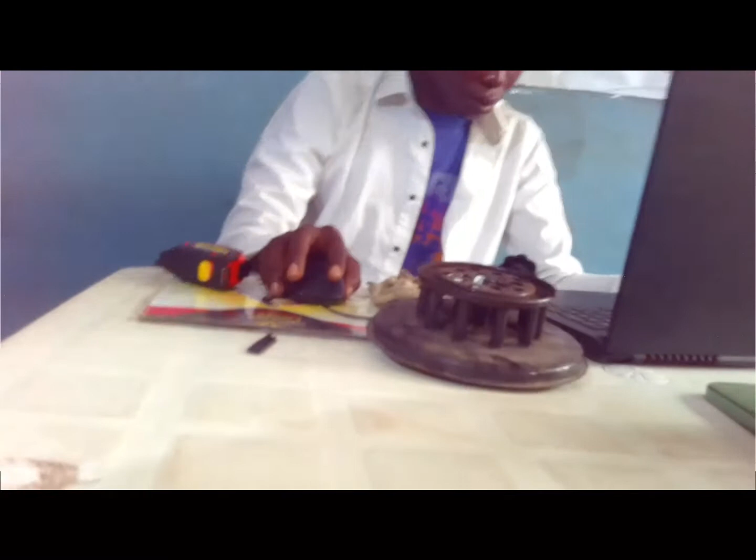Let's begin. I'll assume this will be my top plane. So go to SolidWorks, new, and start. I'm assuming this will be my top plane, so I'm starting with this.

Now I want to measure the distance between here to here. I find it to be 70, and I find the height to come up to 13.5.

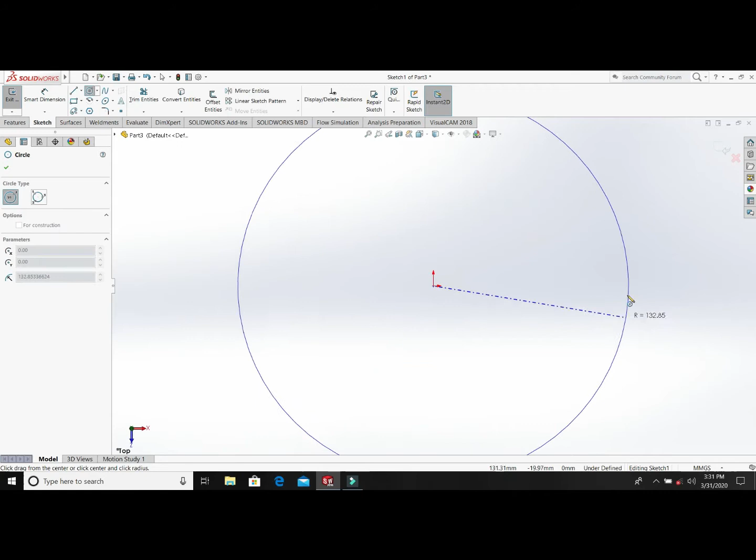Go to Feature Manager, Sketch, and use circle tools. You can generate this with only revolve, or you can also use extrude to get it. I measure it to be 70. I'm doing my measurement again to be sure. Okay, 70, yeah, so we're doing 70.

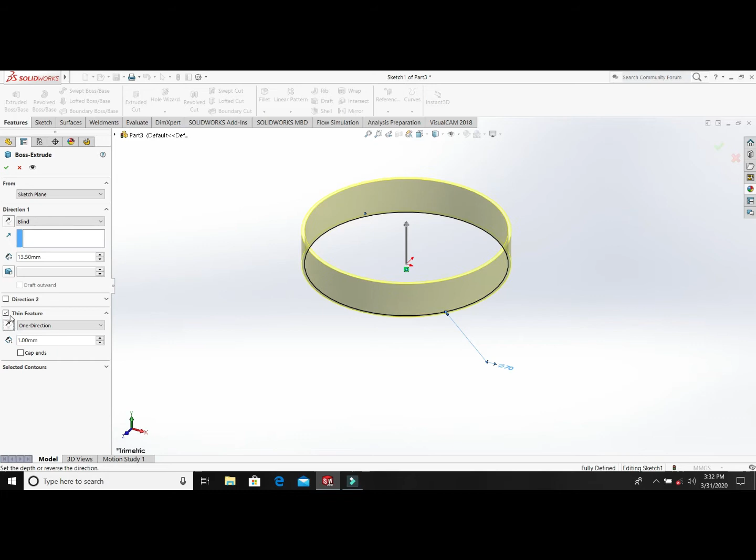Then with that, I'll go to extrude. There's only one thing you'll be adding to the extrude - the height, which I found to be 13.5. So thin feature 1mm, then outside extrusions, then use cap ends to be thickness of 1 also.

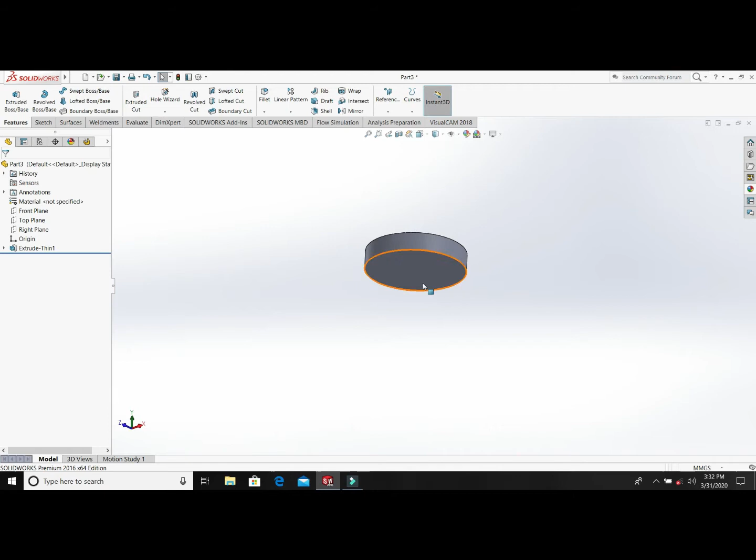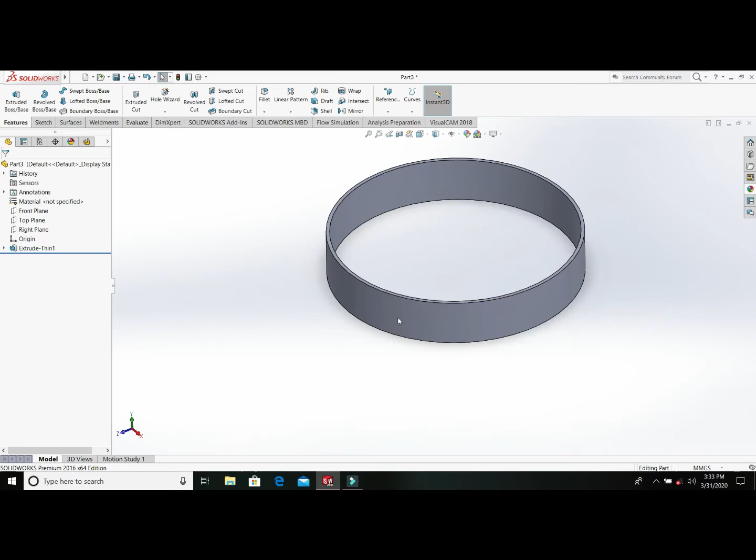It caps both ends, but we don't need both ends covered, so we only need one end to be covered. Let's keep going.

From here you click on this face and say sketch on it. Using convert entity, you convert that face and cover it up. Then extrude with a 1mm extrusion, taking it in the next direction. Then you have this - we've created this space now.

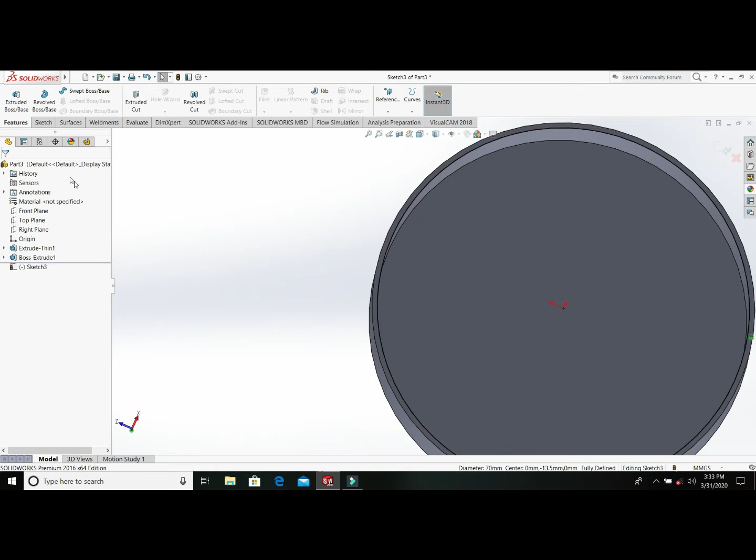The next thing to do, if I want to give this small effect, is to just turn it upside down. Let's do that fast. Click here, say sketch, put here, say convert entity, then extrude by 1mm. You extrude thin feature and make it 5. Let's see what 5 gives us - it looks too big.

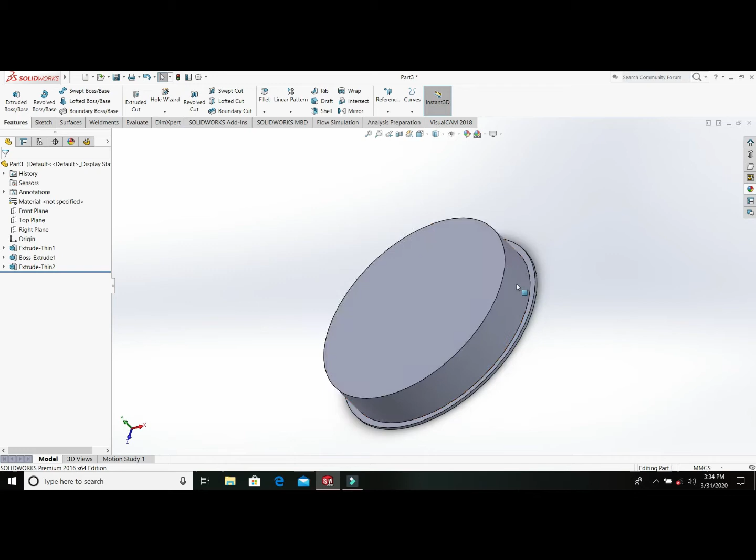All these places were not smooth edges, they were curved edges, so I'm doing all those fillets now right away. This is curved edges, this is curved edges, this is curved edges. So it looks like this - fillet at 1mm, let's look at what that looks like. Right, looks perfect. Then at this edge, the fillet seems too much, so something around 5mm - alright, this is 3mm.

Alright, so we are on the top of this surface now. I want to create this hole. From the center, the hole is at 40mm, and the diameter for the hole is 10.

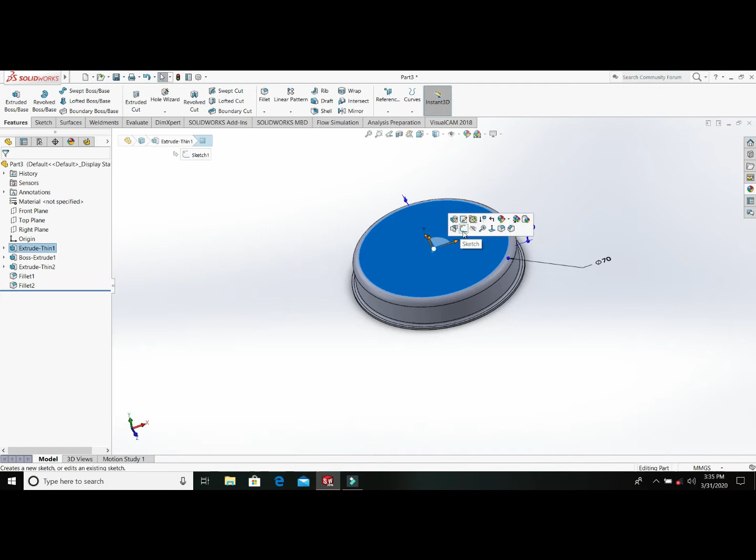Click on this surface, sketch on it, then using a construction line, go horizontally this way. The distance from here is, okay, it's showing 40. Wow, sorry, let's measure this back.

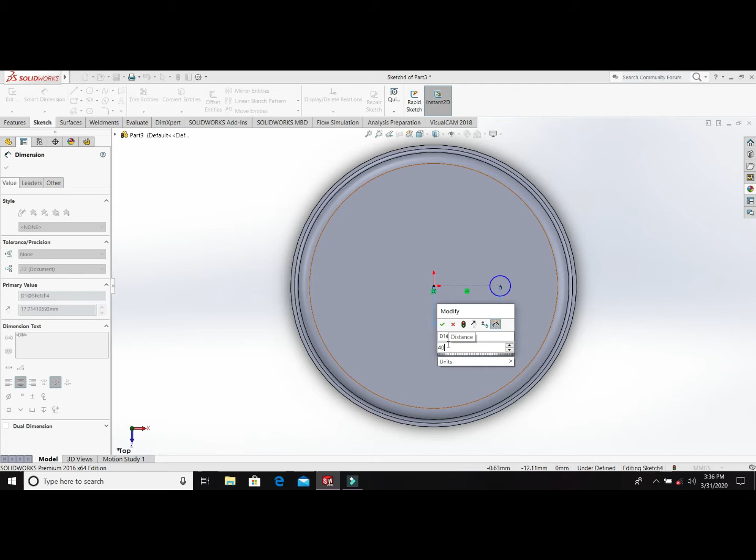I will make it 170 - sorry, it wasn't 70 that very first one, but I will edit it. Let me just finish this - 40, then the diameter is 10.

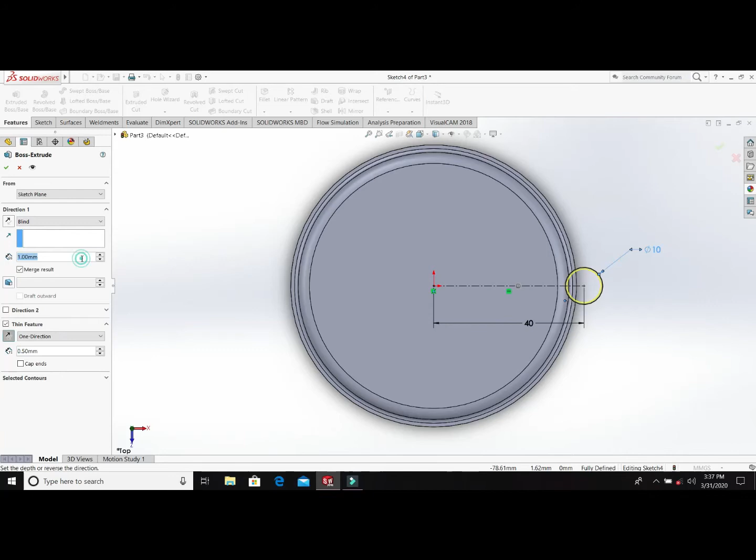So let's do extrude, thin feature, 1mm inside and 0.5mm inside. Then for the height of extrusion, let's find the way of measuring it. This guy is 15 to me, okay, so this is 40 to me. So the height of extrusion is 40. Then we put 40 here - with that we are good to go.

Let's go back to our previous sketch, that is 170, and drive it back. I'm adjusting this to 170. In SolidWorks, if you do such editing after a lot of work, you go to this symbol, which means rebuild, and click on rebuild.

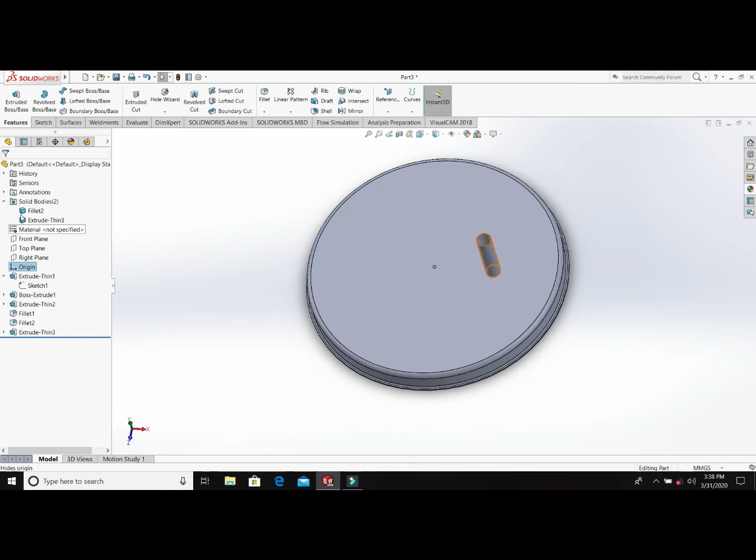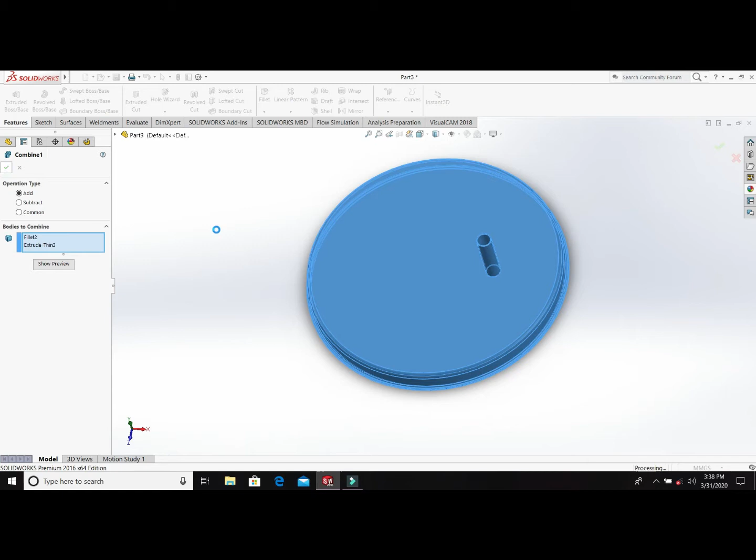It's a part of SolidWorks called multi-bodies. I don't know why that's coming up now, but what I'll do is combine those two bodies and make them one until it's combined. So add them together and make them one, so I'm not actually designing two bodies.

Alright, click on this surface now, create a sketch there, convert entities, and extrude cut. So that's a small cut.

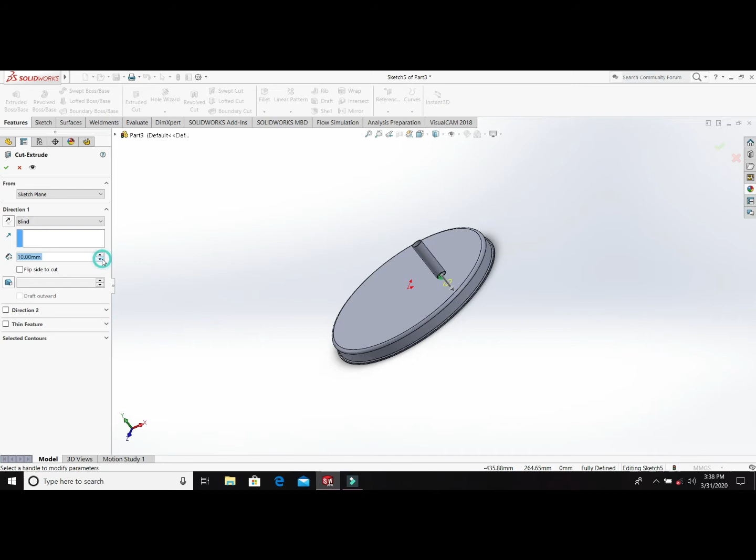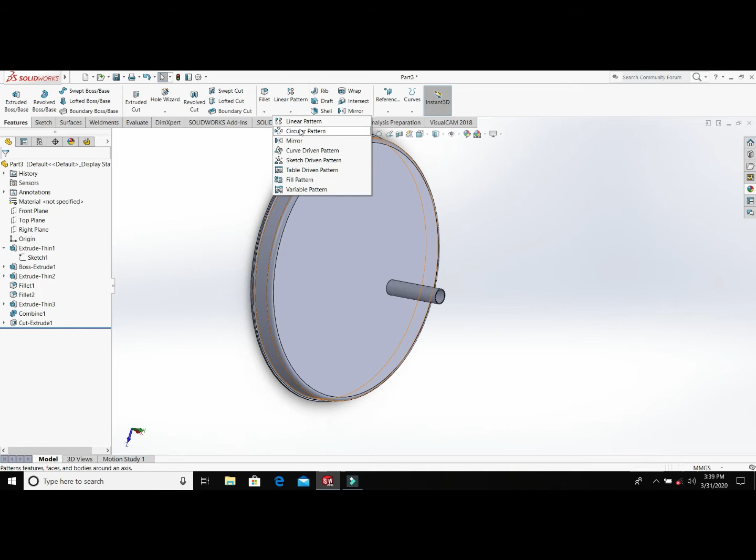So we'll do a circular pattern of this particular thing we did now. We want to do a circular pattern of this in 10 places. Circular pattern - what are the features? The extrude and the cut that comes with it.

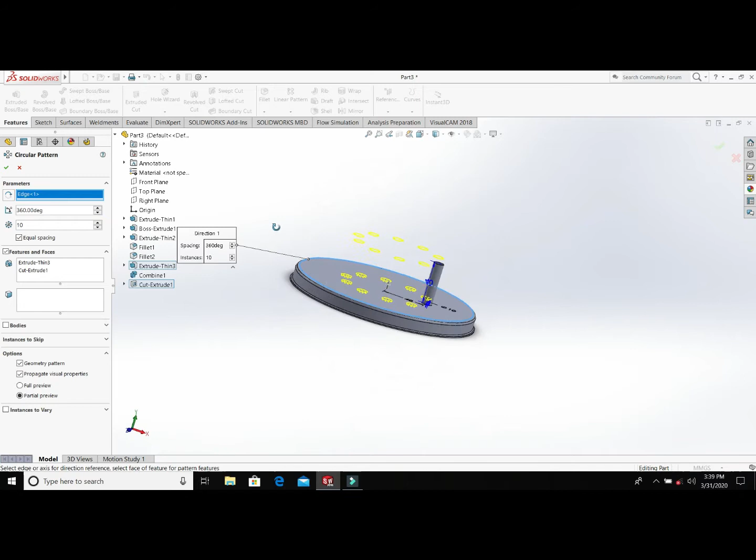So what's my circular edge? That's my edge. I need 10. So put the 10 showing, I'll mark it. Alright, so we have the whole 10 part now.

So I need to design this place where they were sitting on, this particular point where I'm putting my hands on now.

So this is 104, diameter is 104. I need to create something of this nature, and the thickness from here to me seems to be 10 mm.

10 mm. So you zoom out here to the surface, the surface of this guy, that's where you zoom to, and you say sketch. Normal to you, then you measure this guy to be 110. Let me check and confirm again - 104, sorry, approximately 105. Then you put dimensions 105.

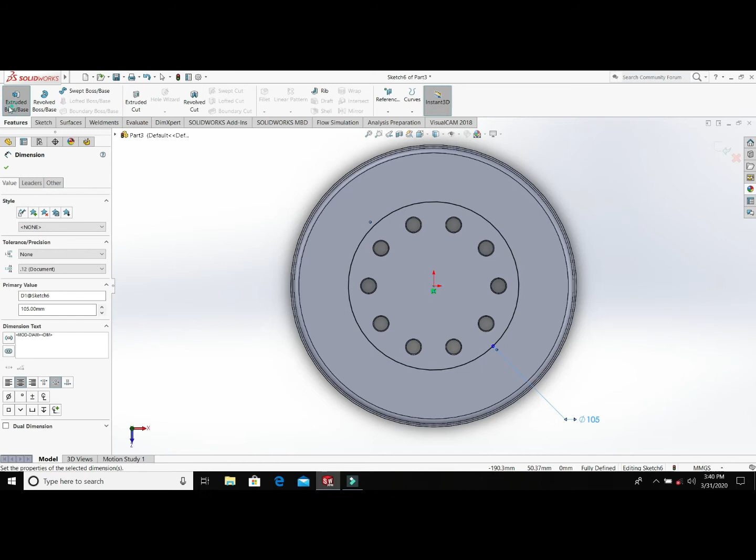So you do extrude, and you do that by 10 mm. Okay, 7 mm. Alright.

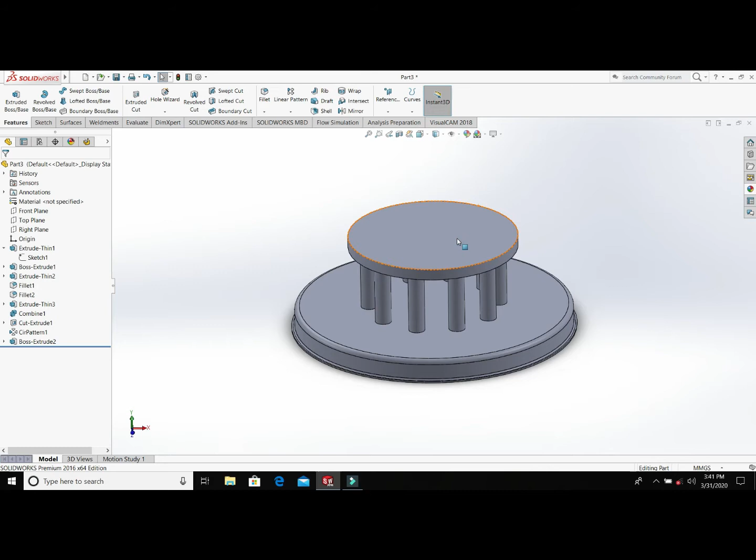So you need to expose this head from here. The only way to expose this head is to do an extrusion here - extrude cut, sorry, you cut that particular place. And that's the reason why you see this groove cut now. That's what we want to do, this particular groove. Let's see.

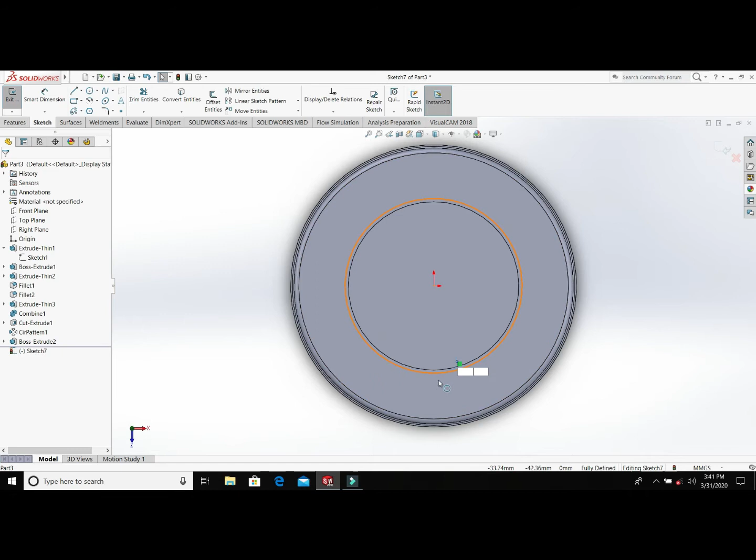Alright, easy. The easiest way to do that is to just say offset entity, so offset entity by 2. Alright, that's an error. Let's say -2. So the offset was in the wrong direction. I just put -2 there so the software knows I'm talking about the reverse direction.

Then you do extrude cut with the same thing. Then you extrude cut to where? You cut up to a surface - which surface? This surface, so that you can expose the head of those things. But it's not a full extrusion, it's a thin extrusion. That extrusion has to be, measuring this particular place now, about 13 mm, 13 mm in the other direction.

Alright, with that being done, let's see. Alright. So we are having this issue.

Alright, let me fix this very fast. Go to that extrusion and make it in 2 directions. The other direction, make it 2 mm. Then the problem is fixed. Oh wow, let's see what happened - this 2 was 2 dimensions.

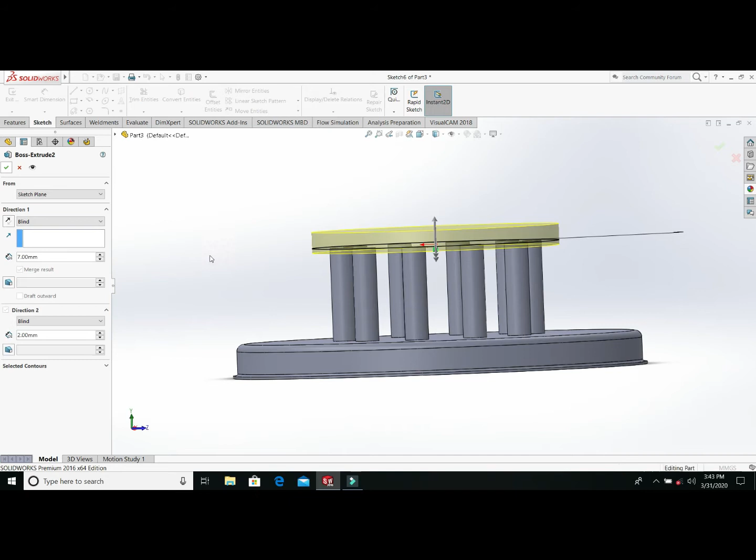Alright, so if you have such results, the problem is that the cut instructions were getting done. Two ways to do it, so let me use this first way to solve that problem that we're having.

Instead of up to surface, I will take blind, then I will take 7 mm. If you feel that the 7 mm will link me to... right. So let's use 8 mm.

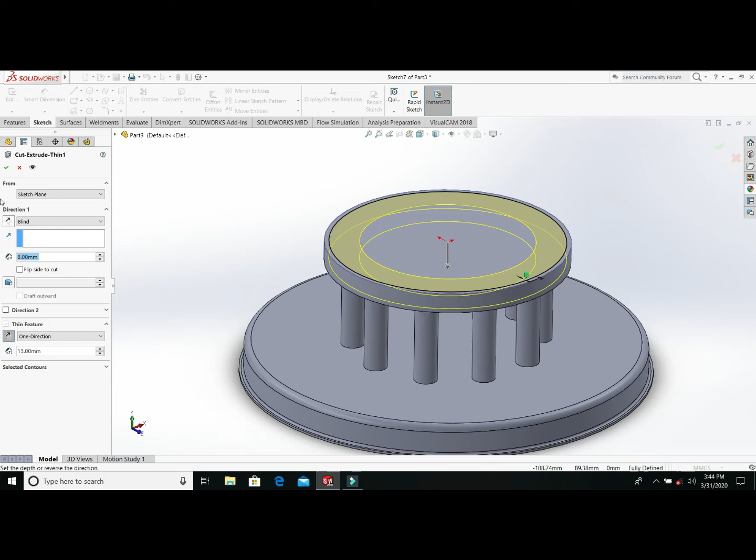Okay, just to simplify this, let's do a sectioning and let's see what's happening here. No problem, let's fix it.

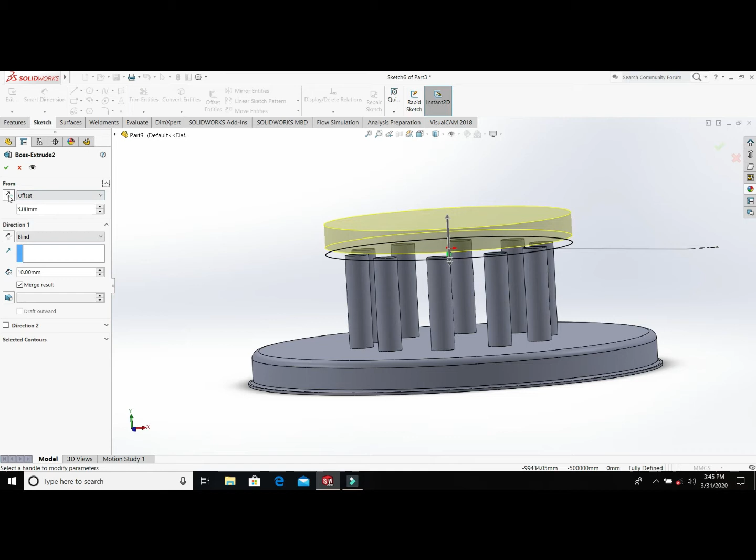Sketch plane, offset from the sketch plane. Now direction 1, make it 10, then 3 more - let's see what 3 is. Then take it to other directions.

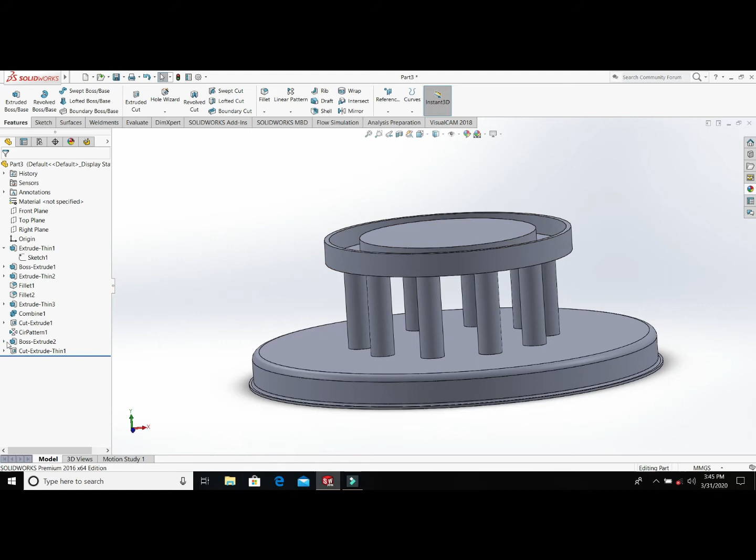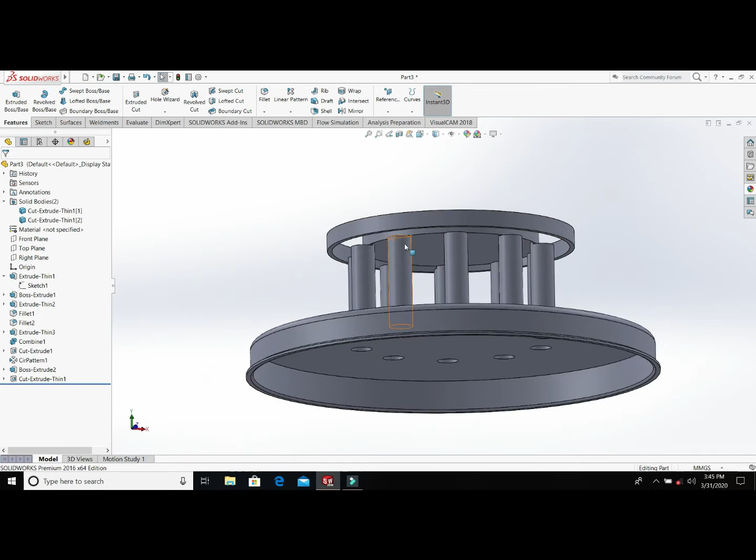Okay, very simple, go back to this place, make it sketch plane, make it 7.

Alright, let's do this one, just to solve that problem very fast. Sketch, convert entity, convert entities, then do extrusions.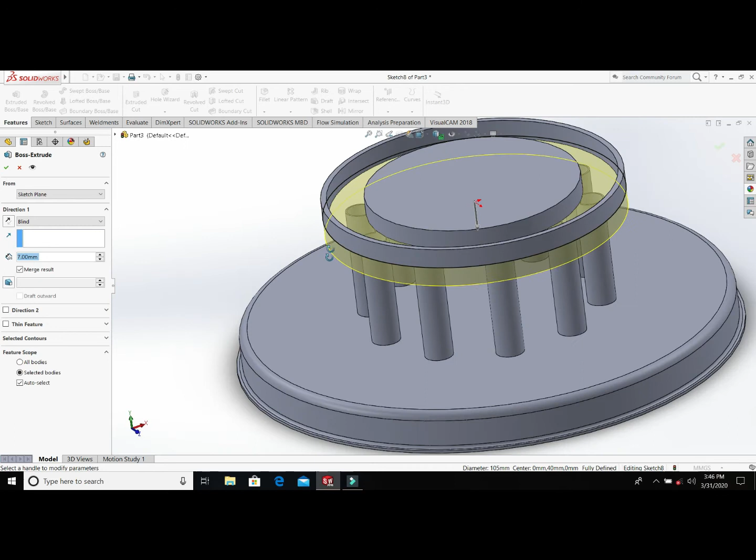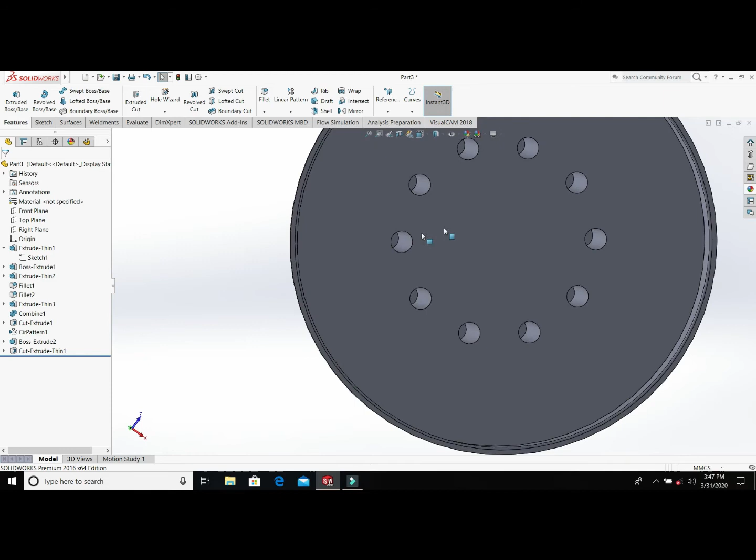Alright, from here, let's find a simpler way of doing this. Click on that surface and say sketch, click on this surface and say sketch.

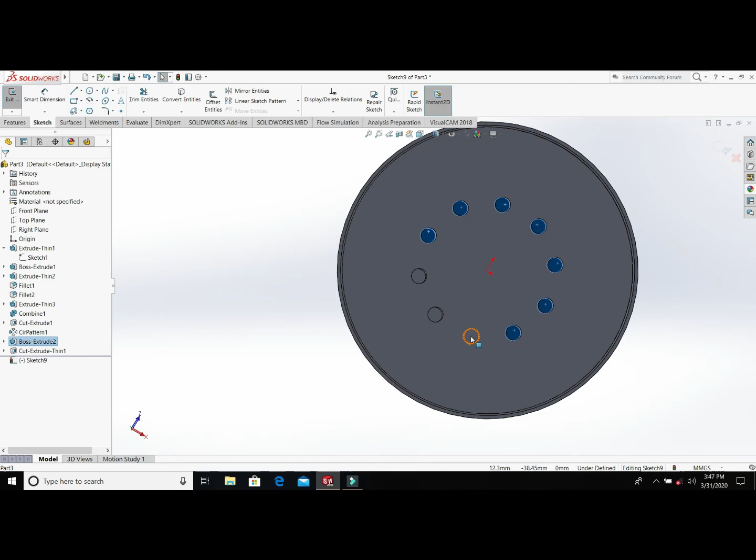So I'll quickly select all those surfaces inside now. You hold down your control key, then select all these surfaces just to make it faster. Then you do convert entities. Then with convert entities, you say extrude cut. With extrude cut now, you say through all...

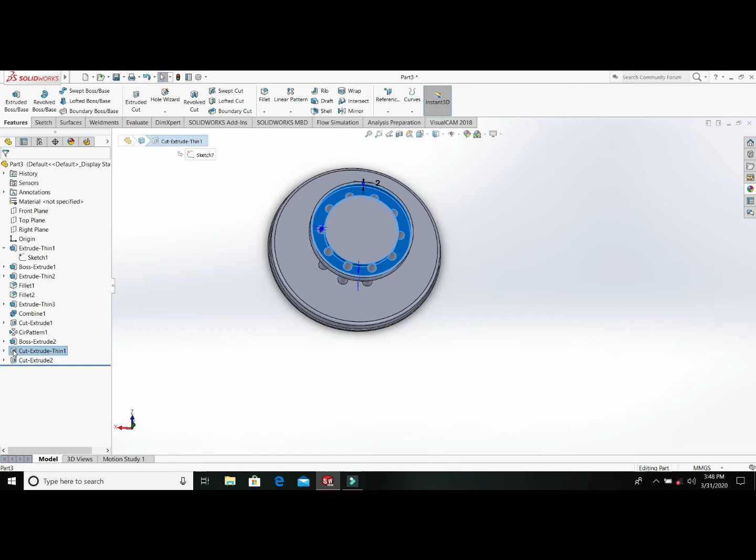So we're having this issue now, let me go back to this cut and adjust the cut to 17. Alright, so we have that now.

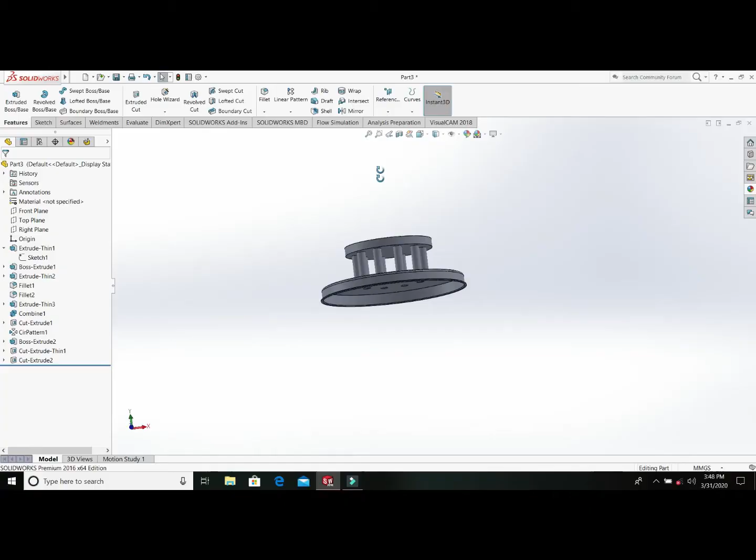So remains this effect, this fillet here. Then let's get all those fillets done very fast. So we are filleting this place, and this place.

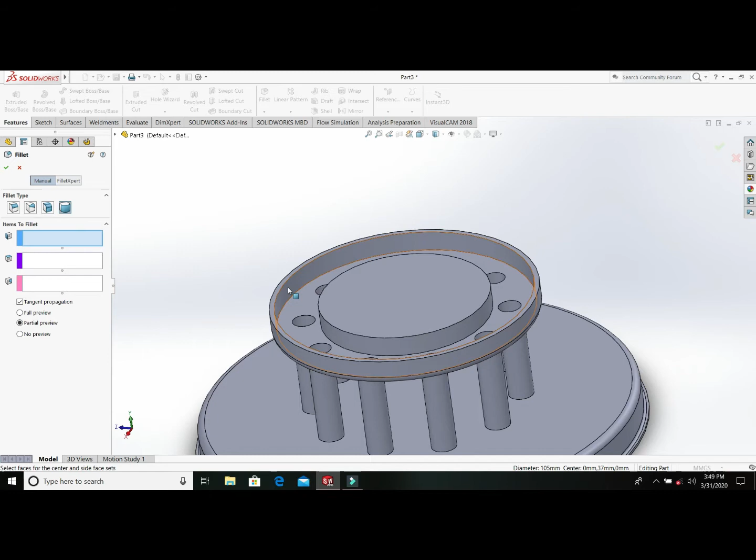So what remains here? We're filleting this edge now, this particular face. Fillet - this time around we'll be using full round fillet. We're taking this place, this place, this.

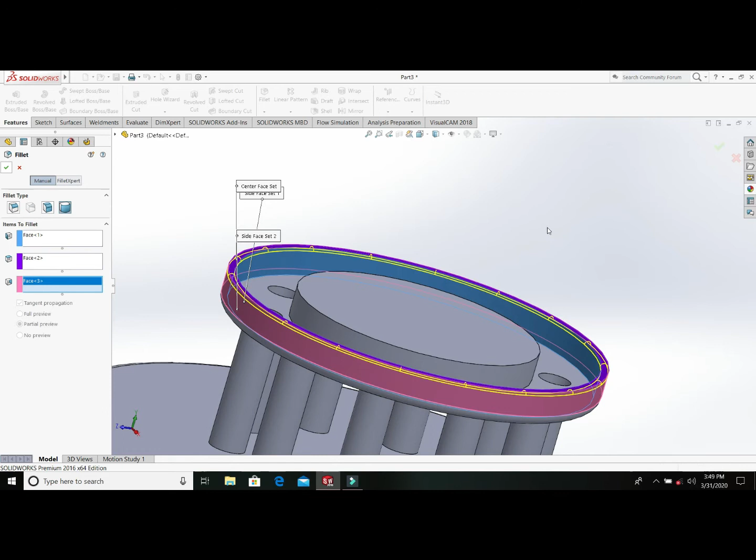Alright, so what next in this one? I think for this particular part now, we are done with it. I'm done with this particular part, so we can move on.

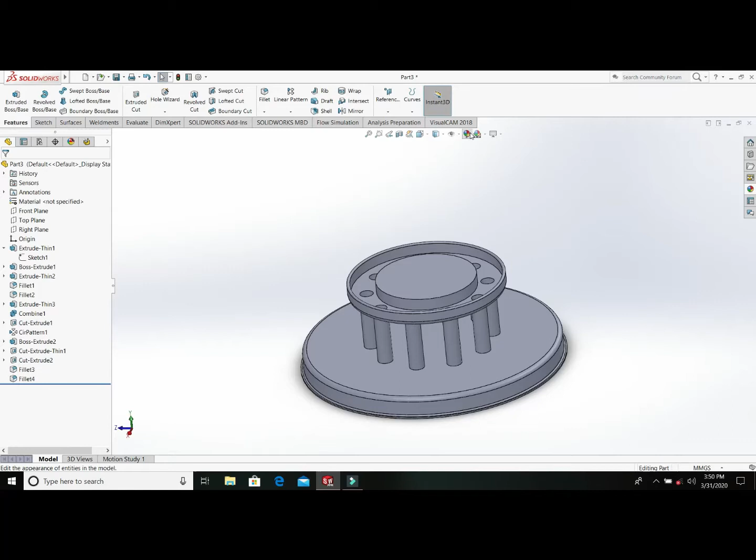So if you are done with that - so it's in black color, let's put a color to it, because black might not be too visible on our screens here. So I'll find a suitable color, and I think this is okay. Mark it once you're done, and say save.

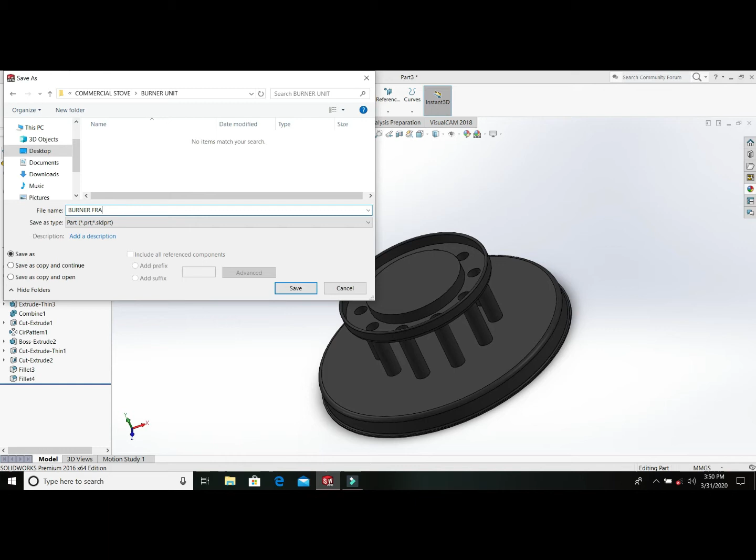So here, let's open a new folder called burner unit. Because the unit is also an assembly, it's called burner frame.

Alright, so we have designed the frame for the burner. The next thing we want to do is this carriage mechanism, this carriage lever. The carriage lever has this base, then has this particular system here that takes it up. So what we are doing now is to design this. I can see this as a circular image from the top plane.

Alright, so Control New. So I'm on the feature manager, then a circle.

So the radius is 51 plus, diameter is 102. Then I will do extrude.

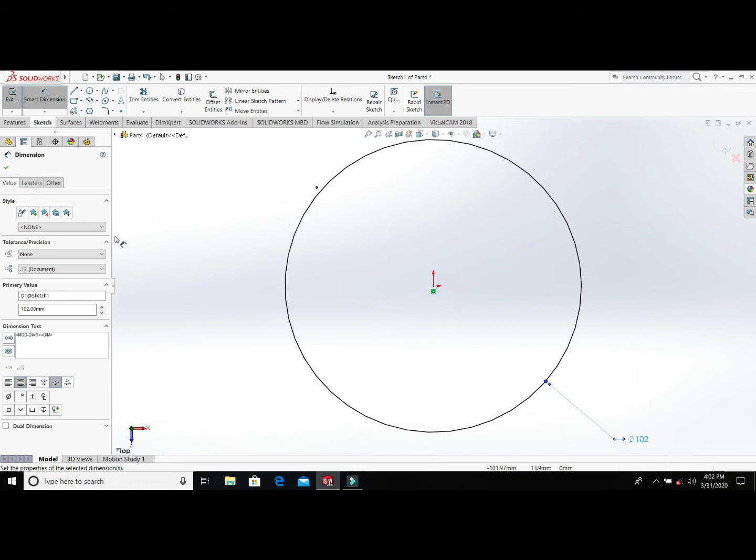So that is like 2 mm or 3 mm, I guess maybe 3 mm. So there is a small cut inside, offset, reverse 1 mm, then cut, offset from the surface, and the offset distance 1 mm also.

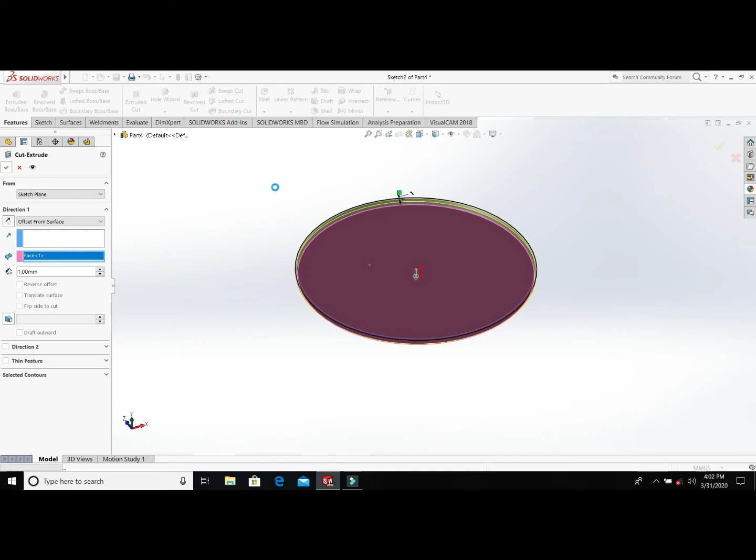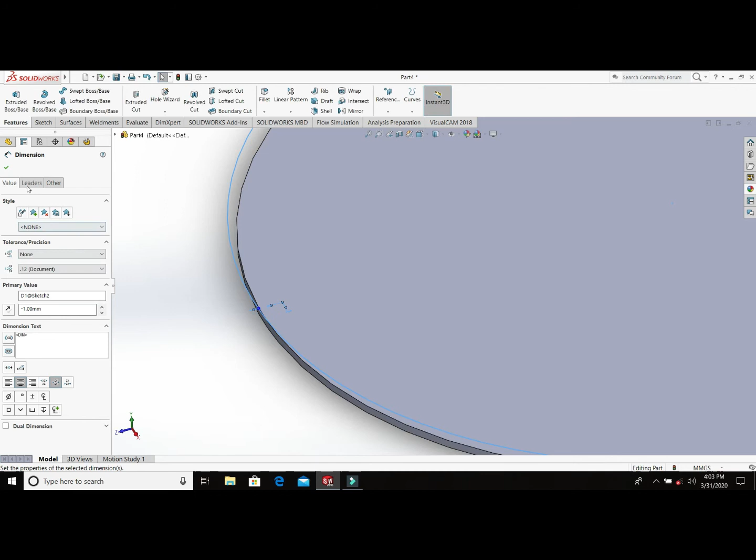What's this? Alright, so the offset is wrong, so minus 1. So very good, yeah.

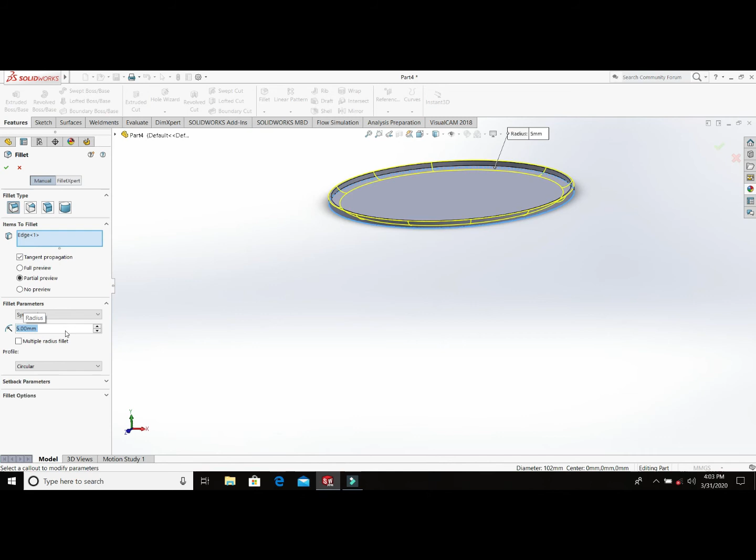So on the fillet here, alright, let's see. So we have that, and here some fillet ready. So we have that now. Okay, let's locate this sample.

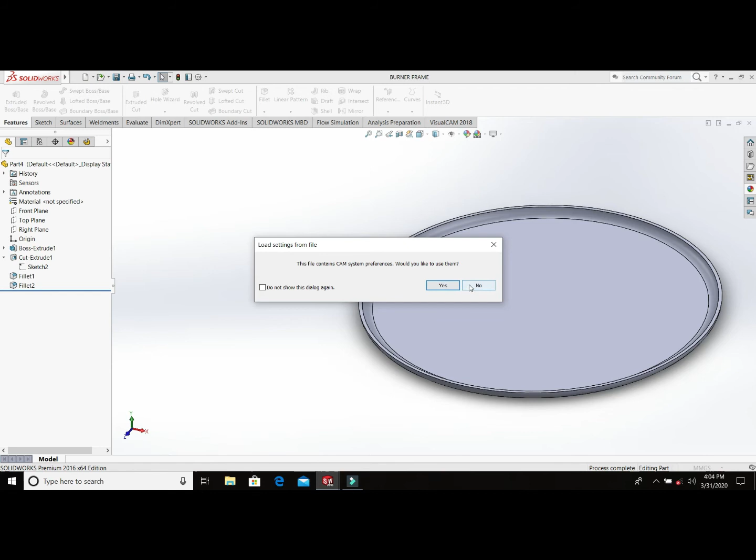But in order to simplify my stress during assembly, I'll go and open up the previous part. I just want to measure that exact location where I put the hole here.

So that it will be much more easier for me. So that particular extrude thing, put it at 40 from center. So I'll come here, extrude click.

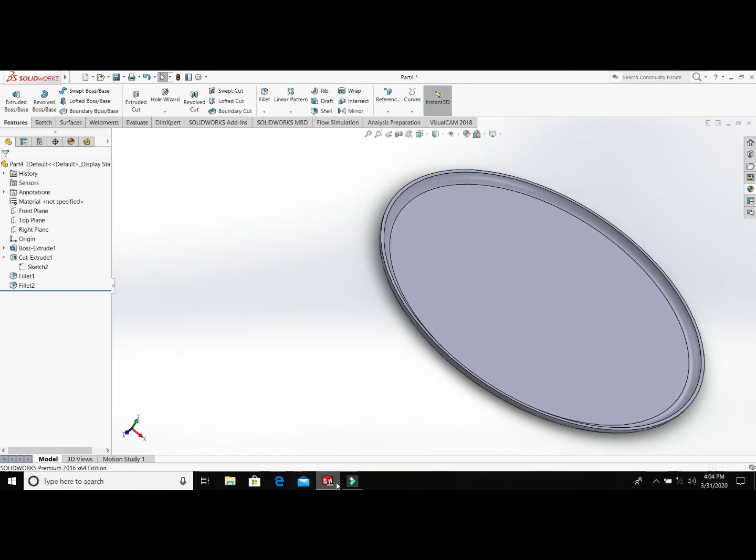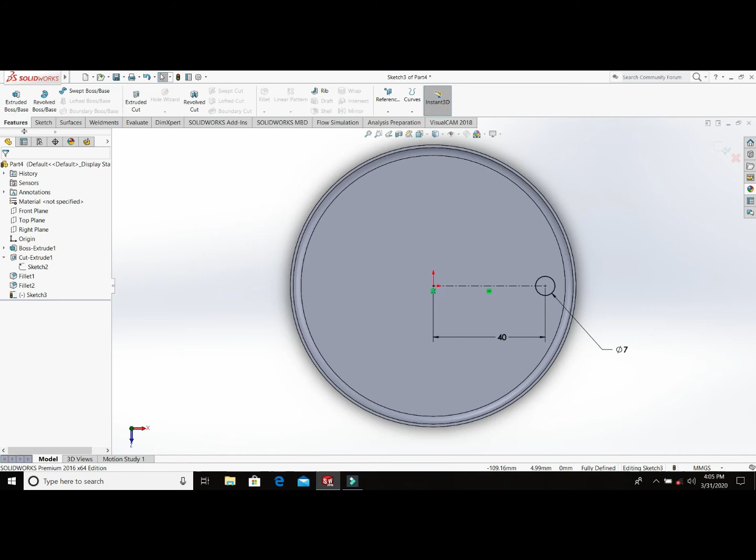40. Then this guy will be 7. Make this guy horizontal. Then you have extrude 10. Then you extrude 10 so that you see if you lower this guy here, this is the feature we are trying to create. This one here, what we are trying to create.

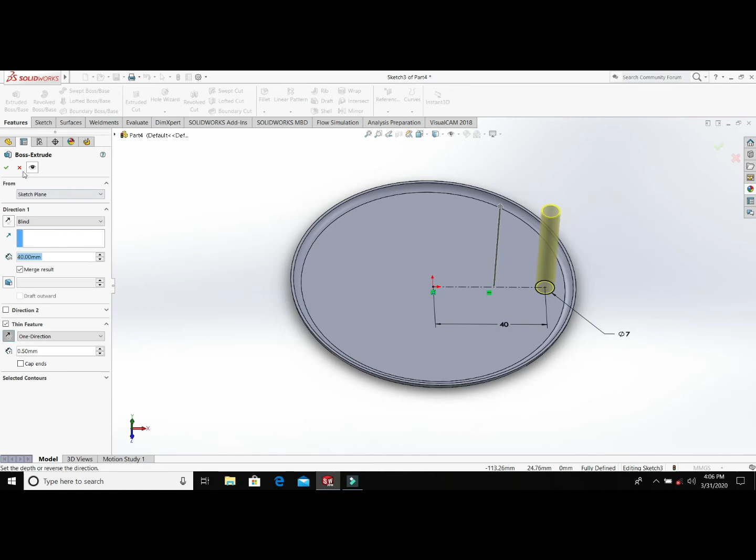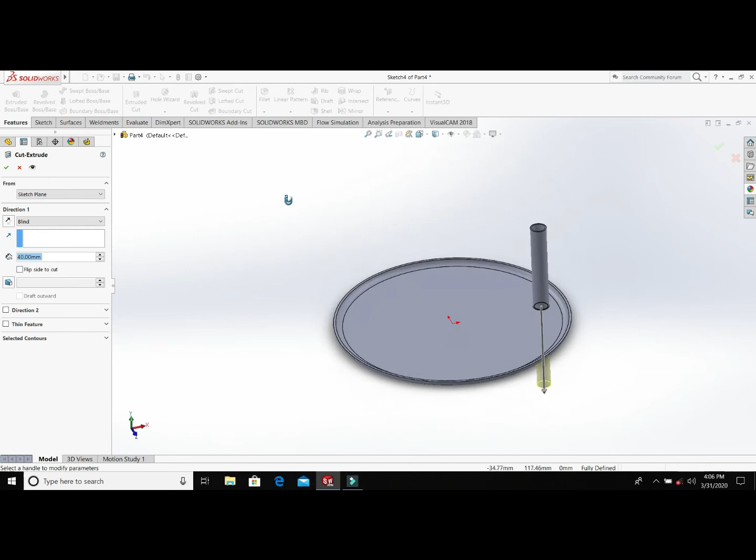Click on this surface, sketch on it. Offset, convert entities, then extrude cut. Then you do that. So what remains is to now do circular patterning it in 10 places around here.

Alright, now that has been done, the next thing that we need to think about is that there's a rack here that we need to take into consideration. So the rack was actually attached here. I want to make them as a whole body now, just to simplify this video. So the rack was attached here.

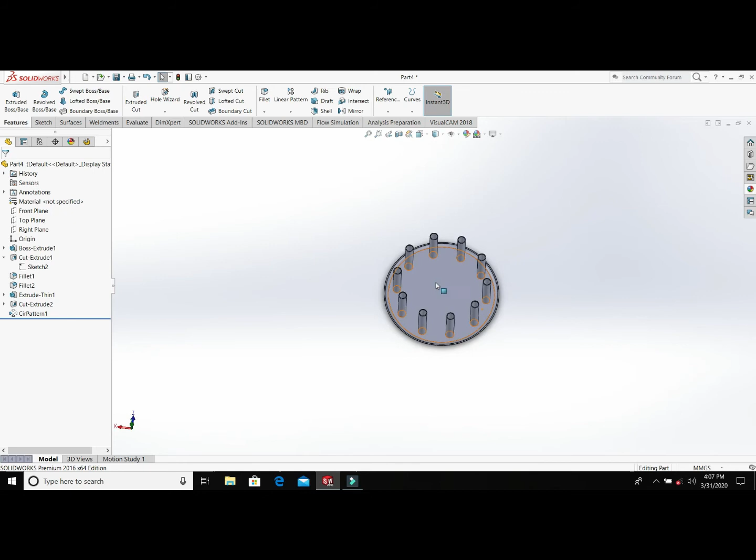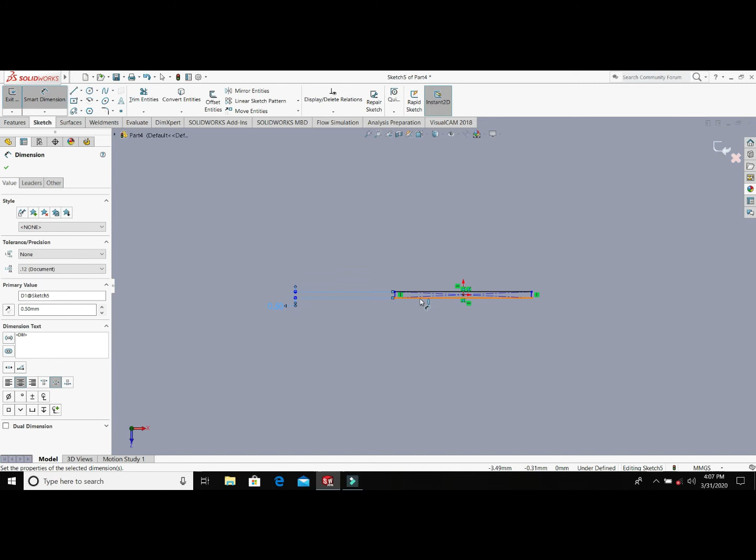So on this surface, click and say sketch using a center point rectangle. So make it 0.5 mm. In this case, maybe make it 8 mm. So I make the height also 40. So extrude that 40 mm.

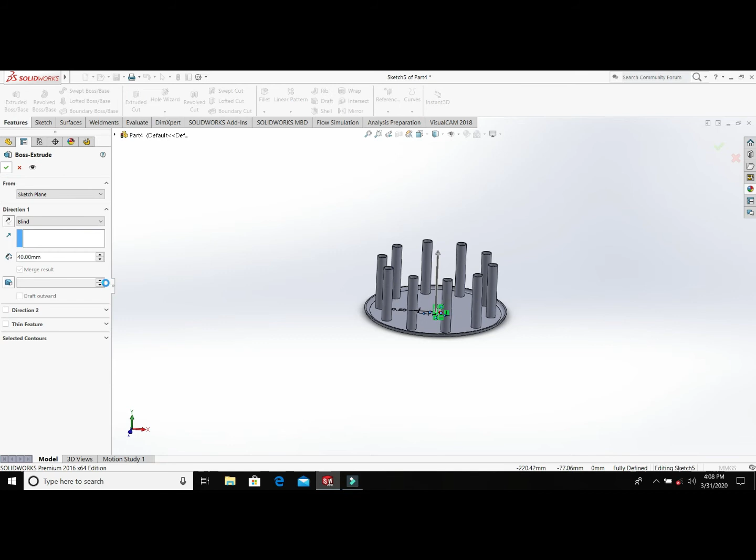Alright, so now to create the groove, the gear system at which the whole thing will go through. So all you have to do, if you are to create this gear - I don't know how to show you this particular gear - if you have to create it, what you have to do is to create only one of those teeth.

So click on this surface and say sketch. Okay, sketch is active. Using your line tool, create something that looks like a trapezium. Alright, so...

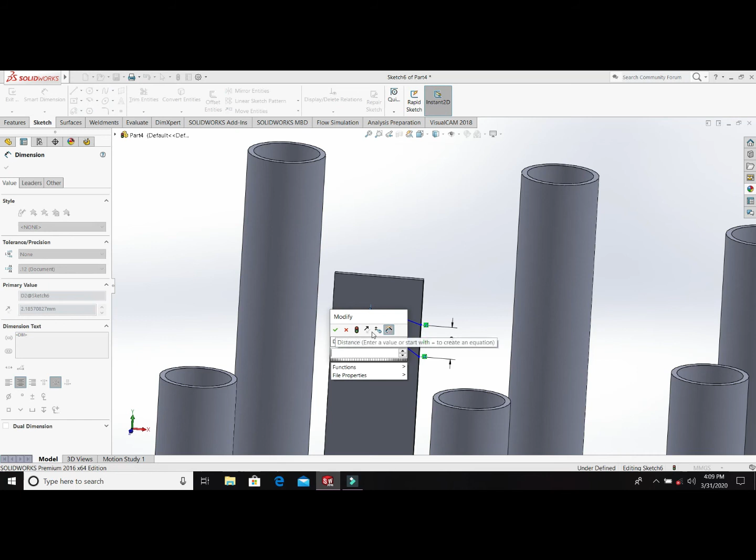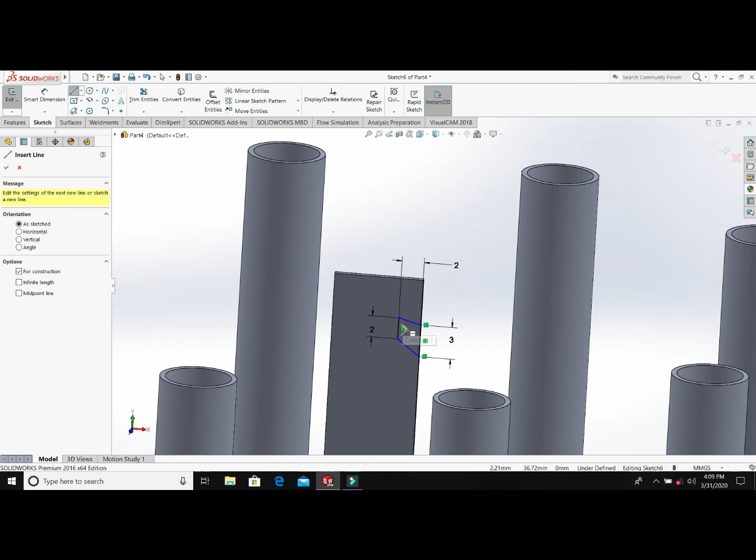Let's give it dimension. So each tooth has 3 mm. One, 2 mm. Then from here to here, the depth of the teeth will be 2 mm. Alright, our job is to make this line and this line equal. So take a center line, construction line from here, locate this place also.

Now they are the center, just make this line horizontal. Then the next dimension we need to add is from here to here. So you add this and add this. Let's just make it at 2.5. Then you do extrude cut.

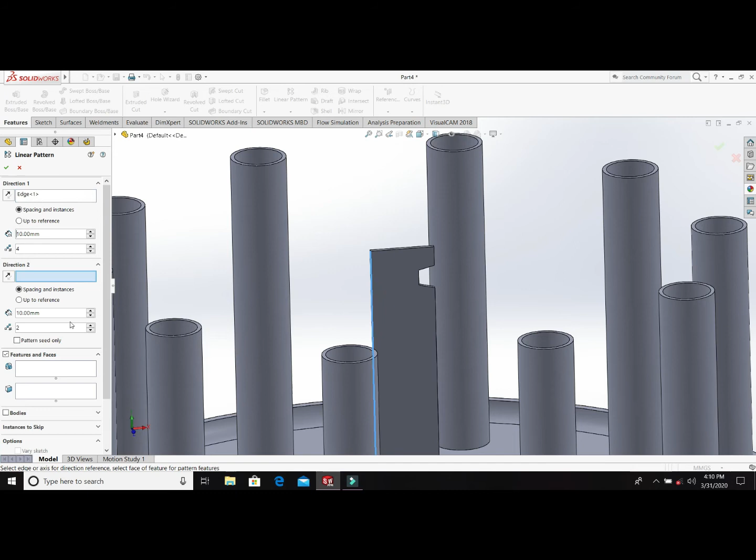Alright, so you have the first tooth shown. So all you have to do is make it a linear pattern of it as it goes down that way. So this is the edge. You are not concerned with the second edge. What you are concerned with is the new cut you just did. Then say you want to put 4, you want to put 5 at.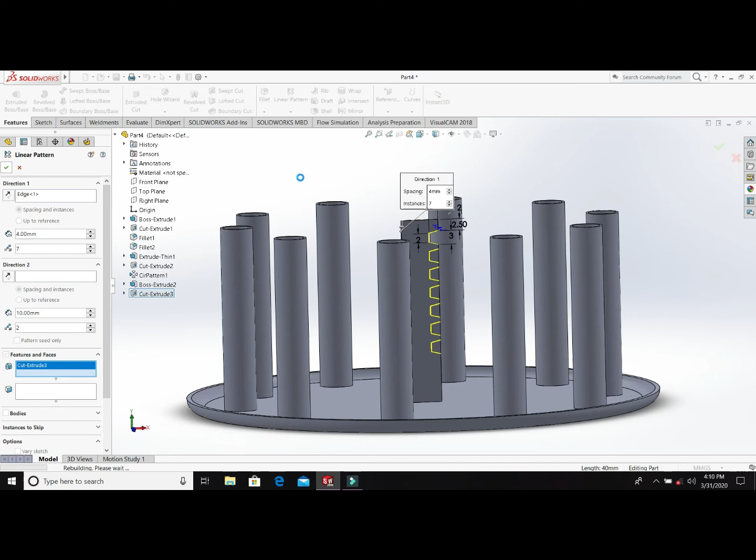So you can make it up to 4. So and that you created 7 rack systems, which depend on the code. So if you have done that and you are okay with it, you are done with the carriage mechanism, go...

to color, appearance, and put the color of your choice, which I felt that for this type of using is - let's go with this particular color. This one. Let's use this.

So we save it and it says carriage mechanism.

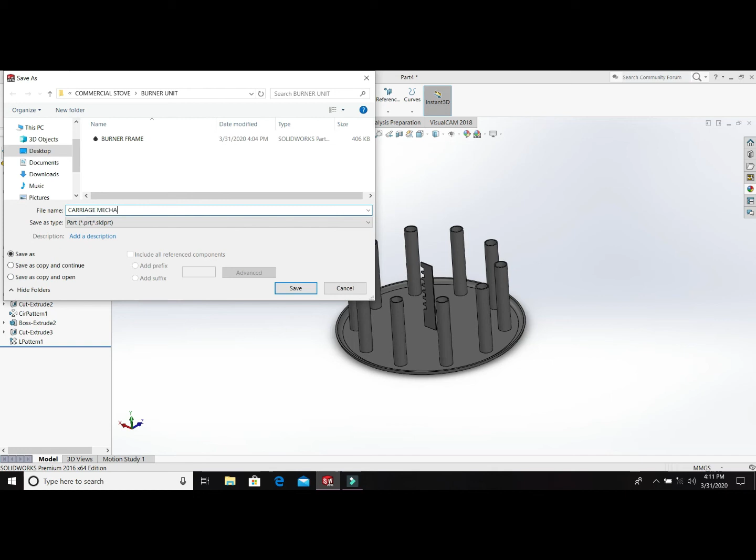Alright, so still on our burner assembly, we will now be designing the control knob, this plastic unit, the shaft, the control shaft, the support system, and the slot at which this guy moves. So what I will do is that I will be doing all these 4 parts now very fast. I'll quickly design them.